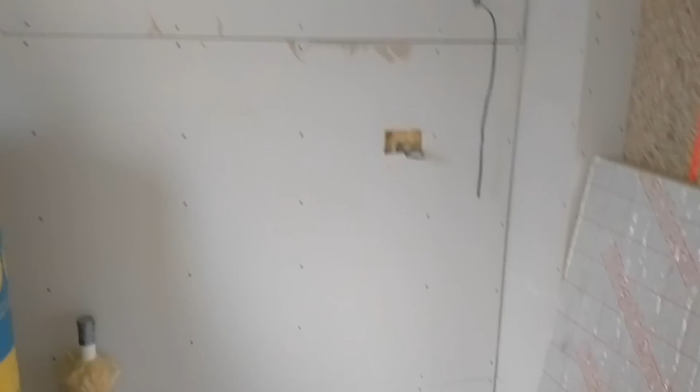Back in the utility room. I honestly don't know where this video is going to fit in, or if it's even going to make it into the cut, but I'm back in here, and I suddenly had a thought in the middle of the night last night that this is a utility room.

We're going to have a tumble dryer and a washing machine stacked there. It suddenly occurred to me, do I need to have ventilation in this room that is kind of manual, like a ducted extractor fan, basically an extractor fan. I looked on the regs, and Part F, which deals with ventilation, isn't 100% clear, but the best guidance online is that yes, it does.

I obviously haven't planned any of that, and I haven't run anything. Now, I've bought a Blauberg extractor fan. I actually bought this for the downstairs toilet. It gets really good reviews, German quality, really quiet, and it looks kind of modern and quite nice. I've got some ducting for it as well.

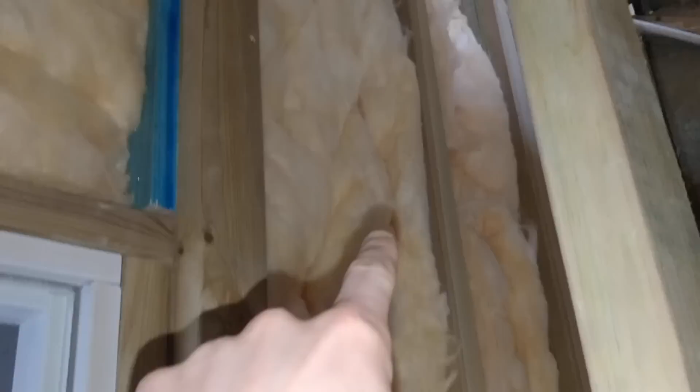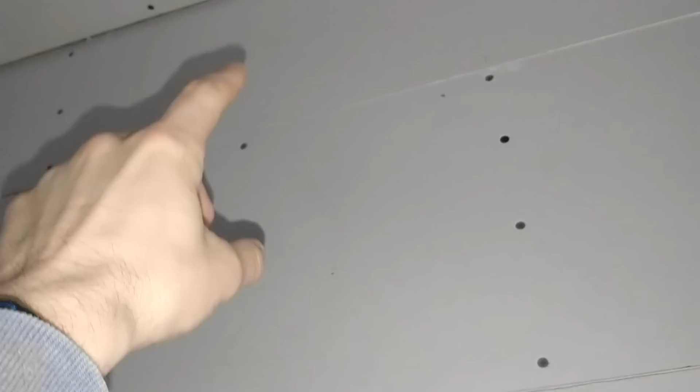My plan is to put it in the wall up here, and then send the ducting up and over and down this way, and out the wall that way. Now, that portion of the wall very conveniently sits on this side here. So what I think I'm going to do is get another extractor fan and have it coming out through here, sitting up around there, ducting out.

So then on this side, where I'm open currently, I'll have one bit of ducting running this way, another bit of ducting, and a Y, and a non-return, like a backdraft stopper, that will stop the smells, any smells, from cross-contaminating with one another.

It's worth pointing out that you would normally have an isolating switch, and you would wire the fan into the isolating switch. I cannot do that in this instance because I am using Kinetic switches, which are very different - you'll see them in another video - but it means the fan will always switch on and always switch off with the light without any isolation. Obviously that's not ideal, but there isn't a lot you can do about it, and it's one of the drawbacks of using Kinetic switches.

So that's the plan, and then what I can do is send the 3-core and earth through that way, and that will power this here. The fan will be powered on the 3-core and earth, the cable can come in through there, and what I can do is take this panel off and run the cable through, because the light is going to be around here, so it'll run off the lights, as a mains powered 3-core and earth.

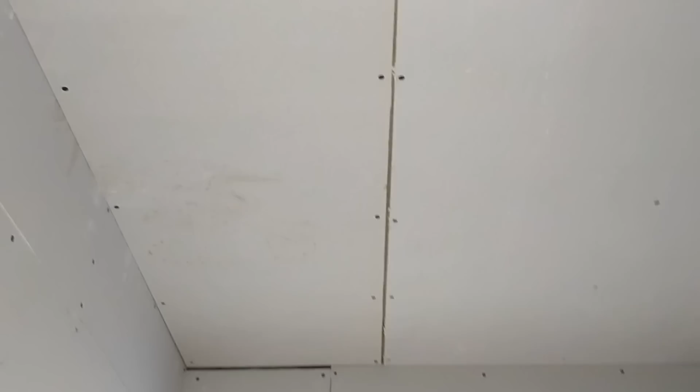So I have now run my 3-core and earth cable. This is just a 1.5mm 3-core and earth, which is why it looks a little bit like a 2-core and earth, because it's not as big.

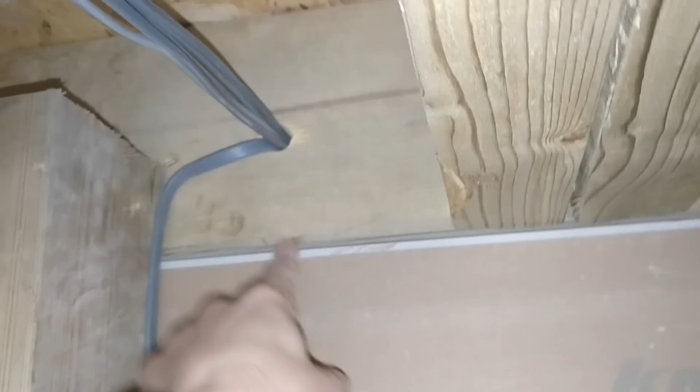So I've got that there, and I haven't decided whether I'm going to run it tight along here, or I think running it around here is most safe because it's most out of the way there, and I've got enough excess on the cable.

Doing it from this side of the room, I can obviously see where the top of the ceiling is there with that extra piece of plasterboard that's poking through with my torch. I can then offer this up here, and I can see how high or low I need to go, and where I want this to be.

What I can then do is offer this up like that. I can draw around it, cut it out, then pocket it from the other side, and secure it in place, etc. So it actually works out really nicely doing it like this.

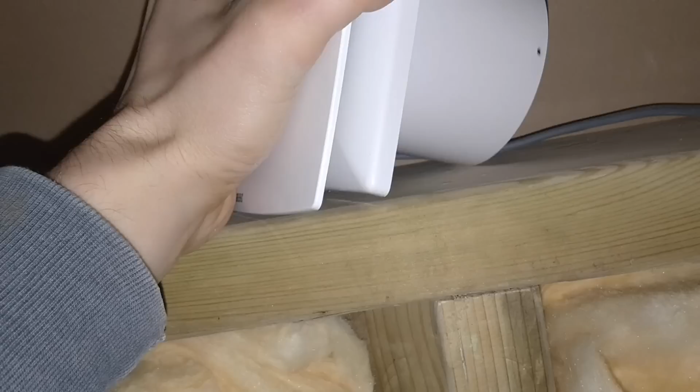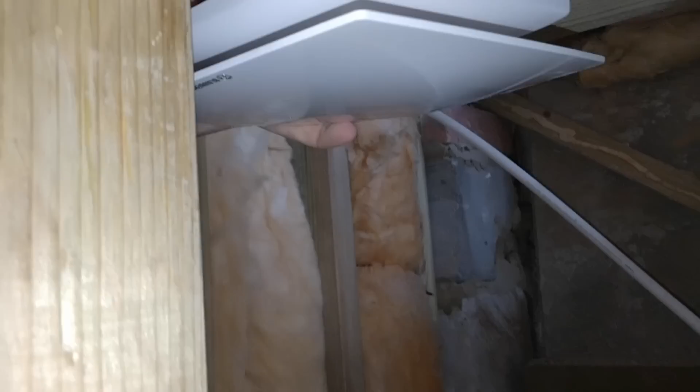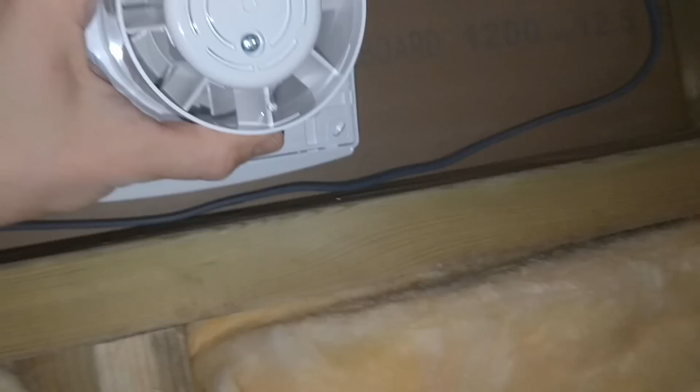Now this is actually quite deep. I don't know if you can see how easy it is to see there, but it takes up quite a bit of space. So over here on this side, I'm going to have a think about where I place it and how it ducts. It may be that I do it up here in the ceiling, in the roof instead, but then it's tricky. Or maybe here in the corner, because I've got flexible hose that I need to run. So I'm going to have a little play with that and think about it as a strategy, and I can sort that.

But yeah, bear in mind there's always this little plastic film in here. That needs to come out, otherwise it's going to cause you issues.

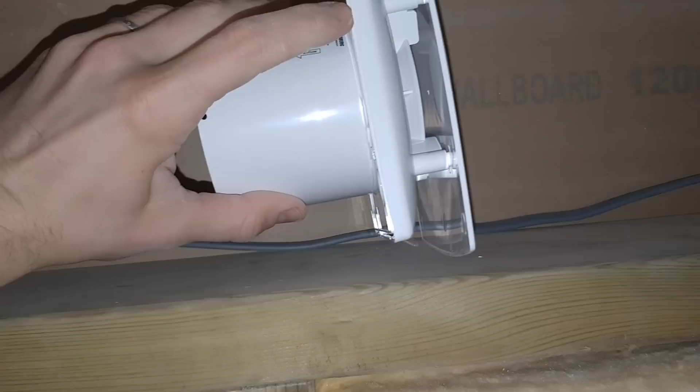But otherwise it's quite an easy job, I think, to get this in, and then I can figure out where exactly in the room I want to have this ducted. So it sits here on the plasterboard. There's probably 3.5 to 4 inches that stick in the wall, and I've got 6-inch timbers, so that's actually pretty good.

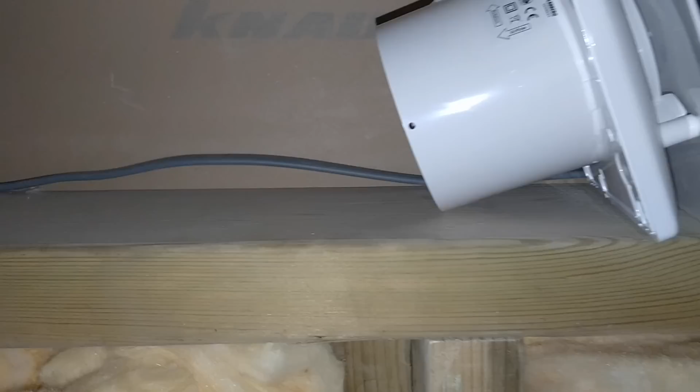But I obviously don't want to have it too tight as a bend when it first comes out of there, although it's air, so maybe it's not too much of an issue. I was thinking I would just trim this down if it was too deep, but I can't because the fan unit is all of the depth of that. So there's that.

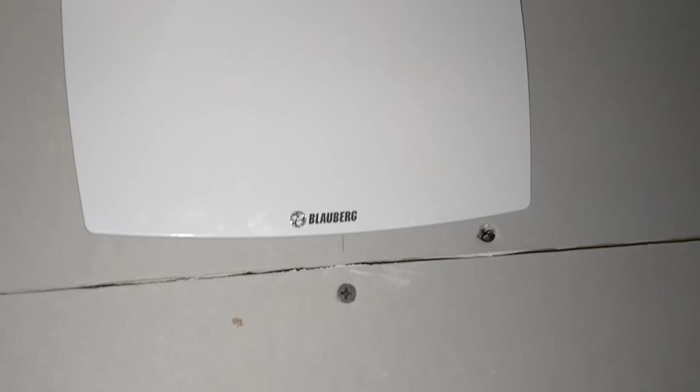So that is what it will look like once the wall's plastered and it's all secured on. That's how it will look, which is really nice. Did a nice snug hole.

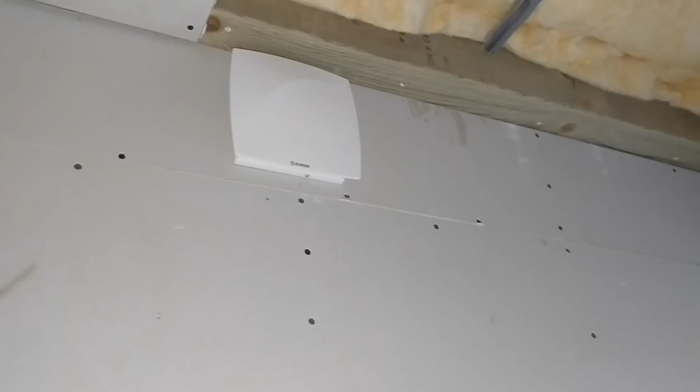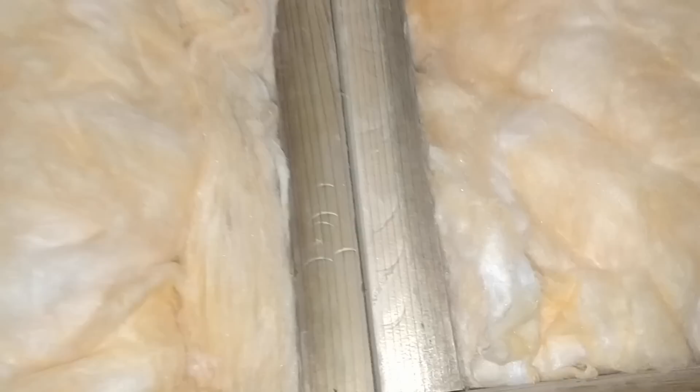Just going to move my ladder and I'll show you what I've done on the other side. So that's the bit that I cut out. This is it on the other side. I actually cut it from this side, hence why there's all this dust up here. Got nice excess length on the cable.

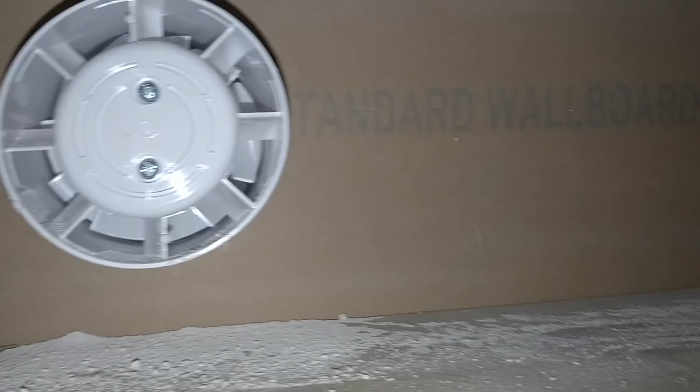I'm really happy, although I can't see immediately where the cables run through. So I'm going to take it apart and see, because I might need to drill a hole to be able to feed this cable through. So I'm going to have a look at that now.

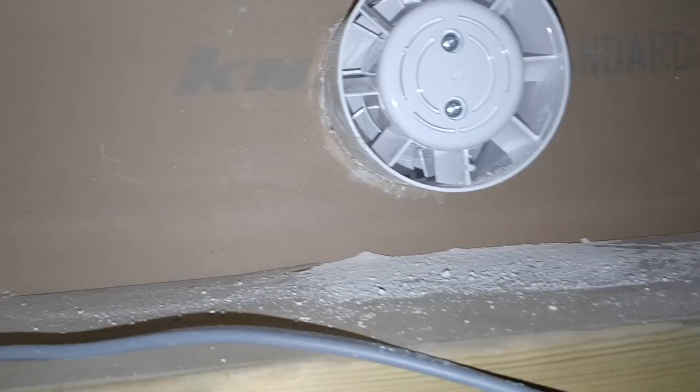So you can see the wiring up in here. Got the space for the screws to go in. There's the switch live, which is the grey wire, and a 3-core and earth - the neutral and the live. This thing's completely plastic, so actually there isn't any requirement for an earth.

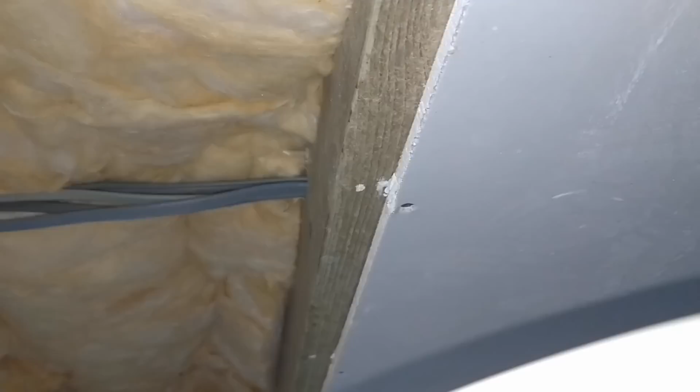So I'm not sure where I'll even put the earth, to be honest. I could snip it and leave it, but have it connected up on that side. I mean, the earth, the CPC, is actually for the protection of the device rather than the cables.

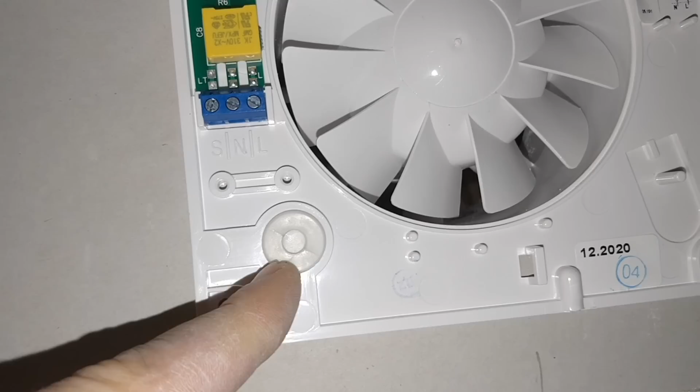But yeah, look, you can see there are these holes here, these grommets that you pop out, and that's where you then feed the cable through. So that's like a little rubber grommet.

If I had a bit more - hang on, what I'll try and do is just pull this out. There you go, so that little rubber grommet comes out there. And I actually don't need that anymore because this is plastic - you don't need a rubber grommet around it. If it was made of metal, I'd need to earth it and I'd need a grommet. Obviously that's not the case here.

So what I'll do is I'll kind of poke a hole through here and then I'll feed the cable through down at the bottom there so it can come up in here. There's also an access point here, so that's quite helpful, I think.

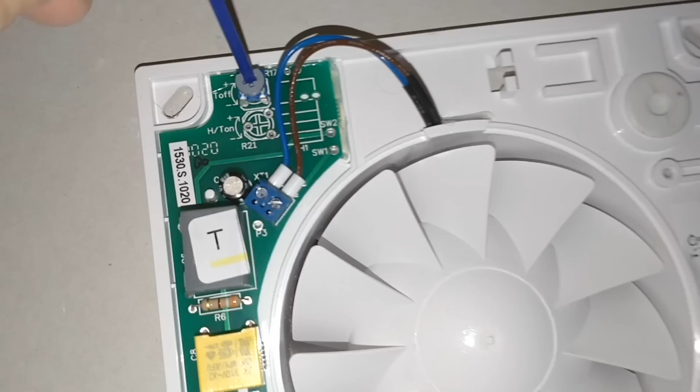The other thing that came with it, I haven't read the instructions yet obviously. The other thing that came that was kind of tucked inside is this - it's a key to be able to, because that's the timer, so you can kind of say how long you want it on for. So round to the right is do it for longer, left is less. So that's just a little resistor, and then you kind of dial it in. So that's what this is for.

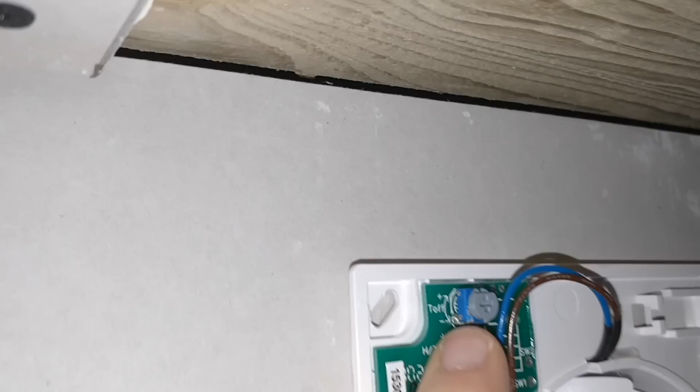So I will leave this in here, and then it can hopefully not rattle around too much.

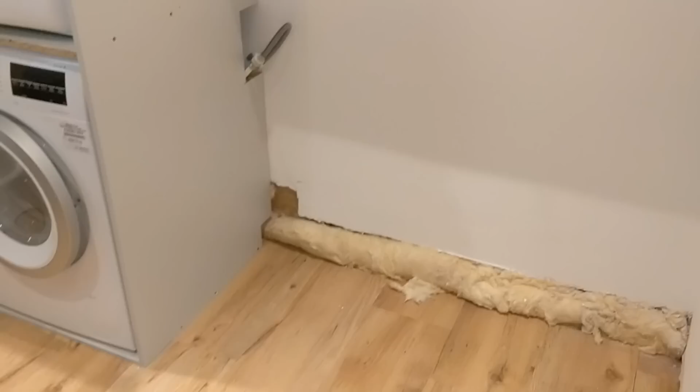This is where I'm at the minute. Built this custom housing, as you know. This is all fixed in place now - these are fixed into the wall, so then they're not going anywhere.

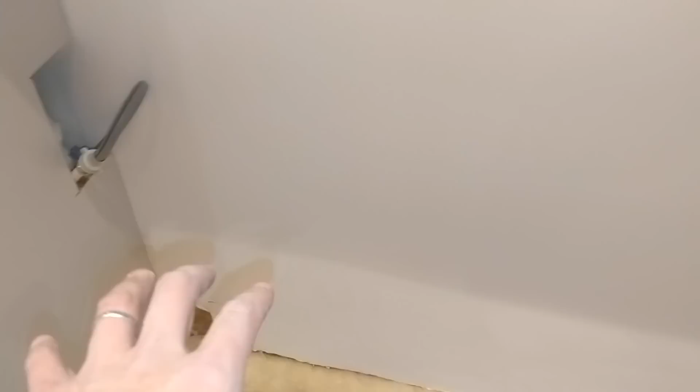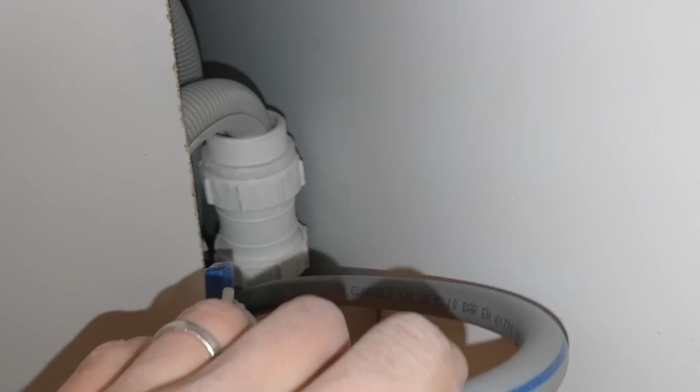I've got cabinets that are going to go in here, and I've got a sink - this undermounted sink, got all the waste and everything. So I need to make sure I can plumb that in, hence why I've cut out this big gap here, so I can hook up the sink nicely.

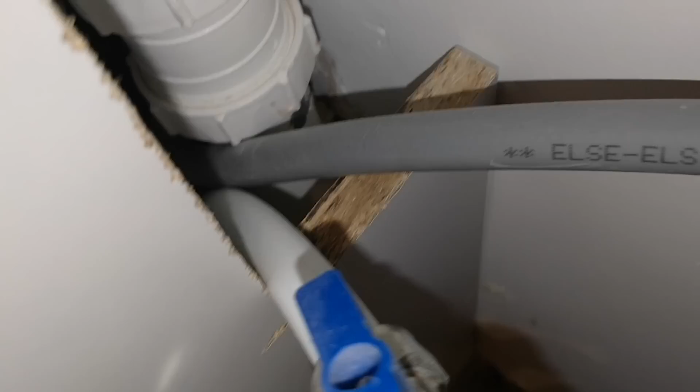Just want to have a little think about that. I've got the hose for the washing machine, a few other bits to consider. So obviously I've got the sink, so I may well pull the washing machine out of here, give myself a load of space to then make all my connections for the tap, for the hot and cold feed and all the rest of that.

But I need to build units as well, so there's quite a bit to do in here. You know, it's not just a case of building units and plonking it on. It is that, but it's also a little bit more than that to make sure that everything works.

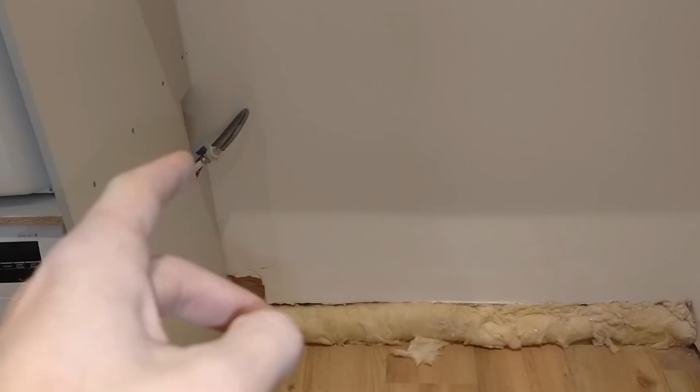I've set the height of this so that these will be hidden. These screw holes will be hidden by the counter, which is kind of neat, as will all of that.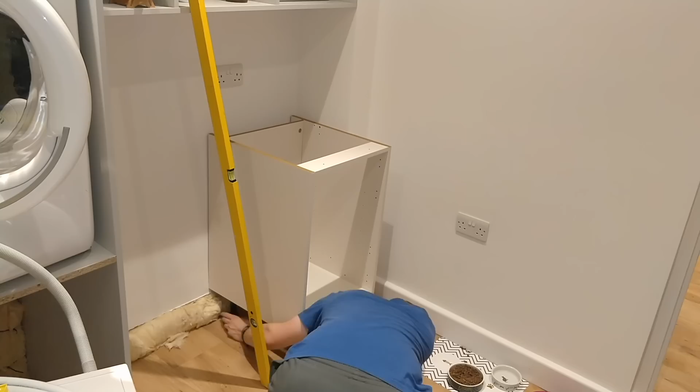I'm just about to cut out the space here for this, there's a boxing in which has all the pipes hidden in it. I'm about to cut it out, which I'm quite looking forward to doing. You may remember when we had the kitchen counters installed, the guys just cut it freehand because they're wizards. If you haven't seen that, I'll post a link up here. I'm not going to be doing that freehand. Well, I will be doing that, but I'm going to be marking everything up first.

I haven't tested this yet, but I'm wondering whether I've got like a white chalk. Yes, look at that, quality. So I can mark on here exactly where I'm going to cut. This is like one of those little chalk pens you get. And I've got a brand new fresh blade for the angle grinder, and a Procore battery as well. So hopefully, and some PPE as well, and I'm outside. So my measurements, got a nice square edge to help me.

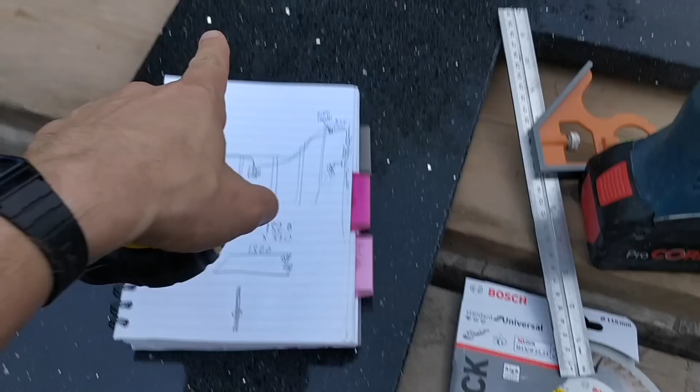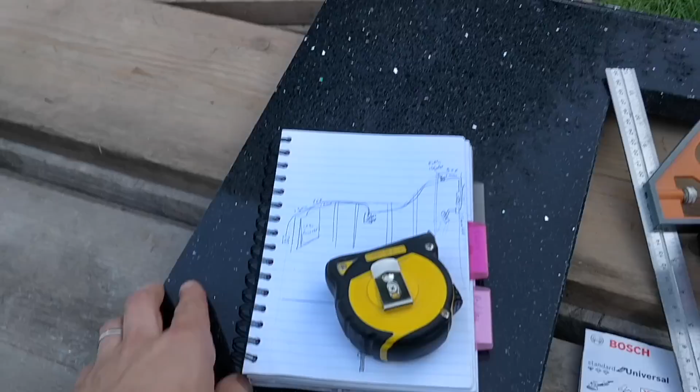I need this length back here to be 1320, 1320. I'm coming up 330, and I'm coming in 150. That will allow a little bit of wriggle room for me to then mount it and box it in, and then I can do the masking, caulk and whatever else up here. So I'm just going to spend some time measuring, marking, and then cutting it.

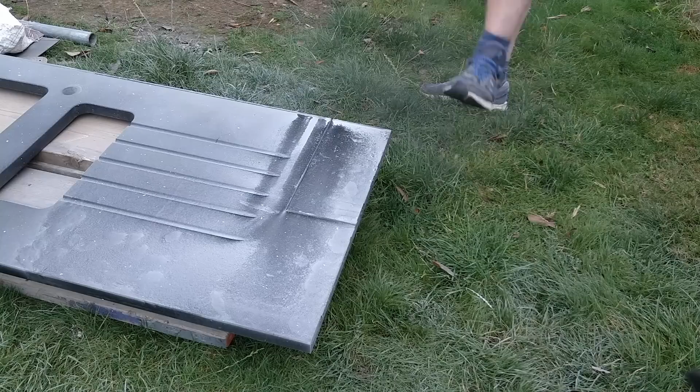Really nicely, that is super smooth, as smooth as I'm going to get it. This blade is brilliant, X-Lock blade by Bosch. It's got these kind of serrated edges, you get a really clean, smooth finish. Very happy with that.

You see, I knocked off the corner and then I gently took out the excess, the little bit that was holding it on. So yeah, that's done. Now I've got to test and see whether it fits. I'll take you inside and show you where we've got to.

Right, I didn't film the installation of this because I've mismeasured it. In fact, I didn't mismeasure it, I misordered - I ordered a 500 wide unit when I need a 400 wide unit. So that was very stupid on my part, and I don't know how.

Anyway, I bought this second hand, got it off eBay, and whoever cut this obviously cut it to fit their own walls, and it wasn't quite square, so this is out a little bit here and out a little bit here. I know my walls are square because I built them, and I cut this square, and that is nice and tight because I measured it and I cut that. So it is what it is.

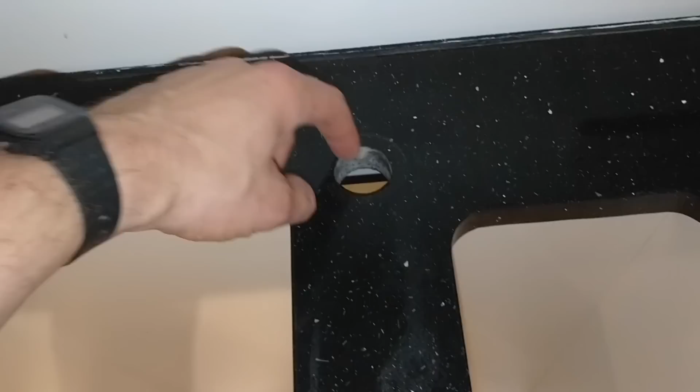I'll have to use a little bit of caulk or silicone, whatever it is, to try and fill this and blend it in. But it's in, and it works, and it hides the screw holes as I had planned and hoped. And I'll have to drill out a little bit for the sink, for the taps, but they'll reach, which is good.

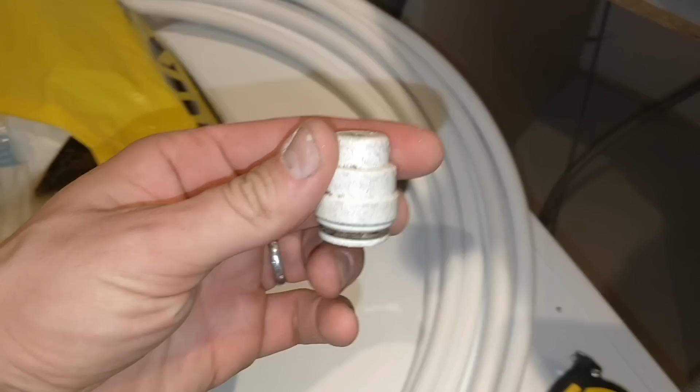So I'm actually going to attach those on now, or I might even just put some instant stops on there, one like this, just because that way I can switch on my water, hot and cold, which I've switched off at the mains. So yeah, I'm going to sort that now.

One other point to note, I have bought this second hand. When I planned and designed this, the sink was going to be much closer over here. Either way, that plug socket was always ambitious, and isn't actually very necessary - we have one here, we have one behind there, and we have one down there. So I will decommission this one. It's not safe, it's too close to the zones, having the sink here, plus the plug socket.

So I'll take this off. I'll connect up the ring at the back, and I'll put a piece of plasterboard over it and cover it over and smooth it and all the rest of it, because that's not right. So yeah, I'm going to sort the taps now. I'm going to call it a night.

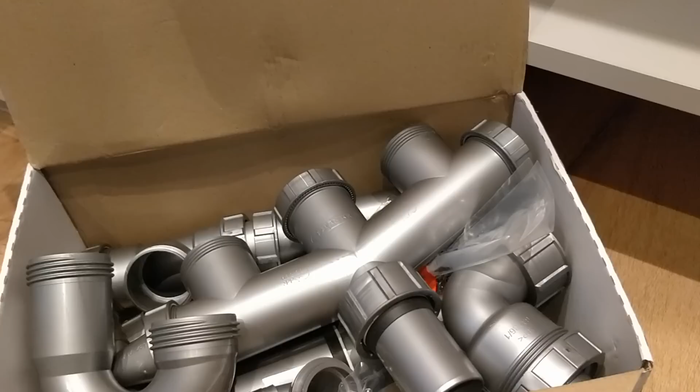This has now arrived, and by this I mean this. I don't know if Franke basically force you into using their products. I would have been quite happy to carry on using this, except for the fact that it had been cut off and it doesn't seem to fit any other standard sizes.

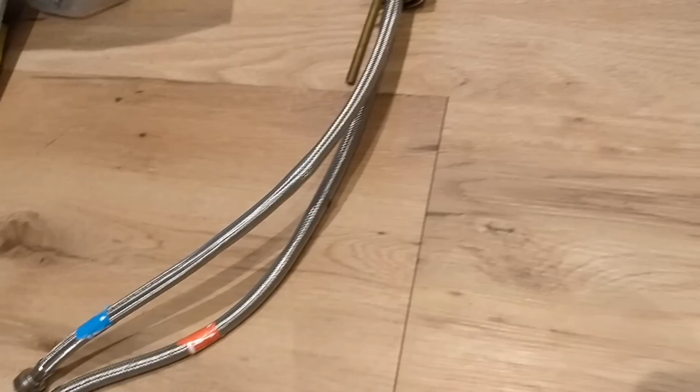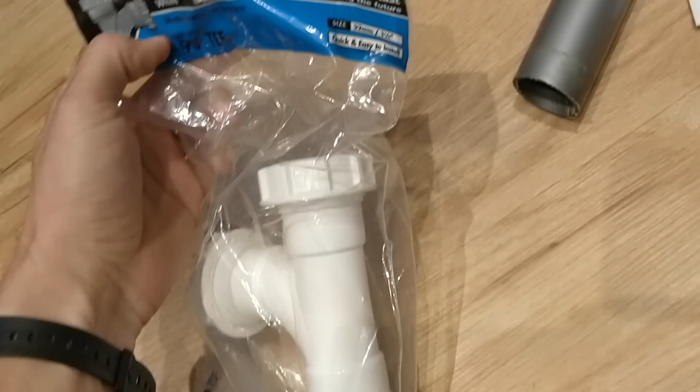I tried 32mm, I tried 40mm, I got a whole range of different sizes, 32mm, and it looks on the outside like it fits and it's the same thing. Yeah, you look at that and you go, yeah, that's close enough, and then you screw it on and it doesn't screw on.

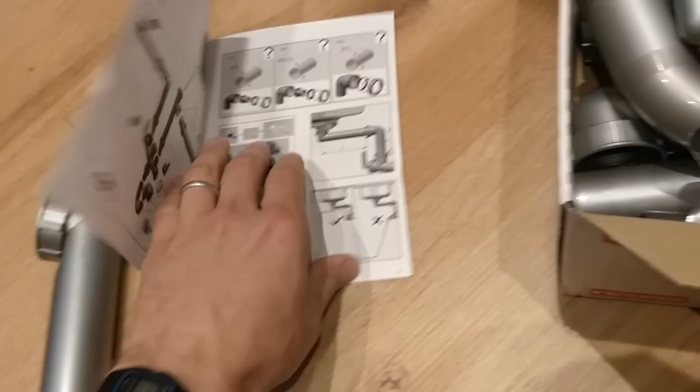So I've had to buy a Franke one. Thankfully I was quite fortunate - well, quite pleased. This was only £30 off Amazon, so that is very good. I'm basically now just going to put it together. It's pretty self-explanatory, and I have to say they work really very nicely.

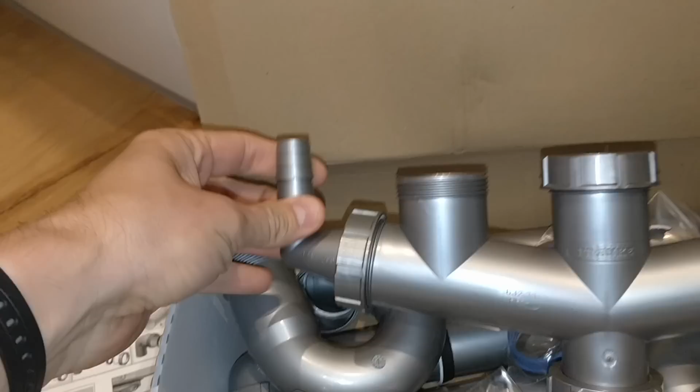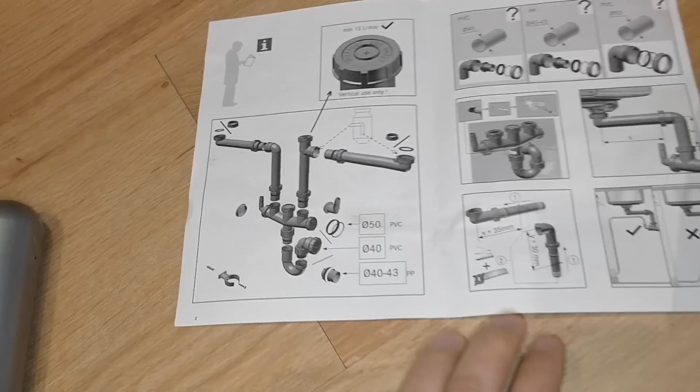I'm going to rig this up, and then once I've put it together and figured out how big it is, I'll figure out where the waste needs to go out, and for the waste of this to come in here and go back out, because it's easier attaching the waste end onto one of these rather than having a splitter and the little hook. So this is what I am going to be doing now.

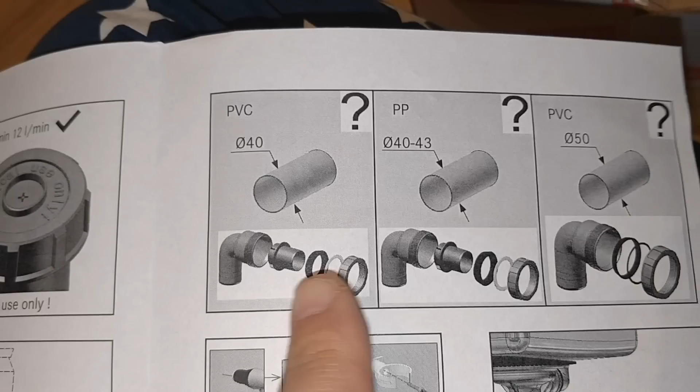It looks like you can put it onto different sized pipes if you get these different converters, which I don't have - I'm not a plumber, you all know that. Either way, I've got this now, so it's all good to go.

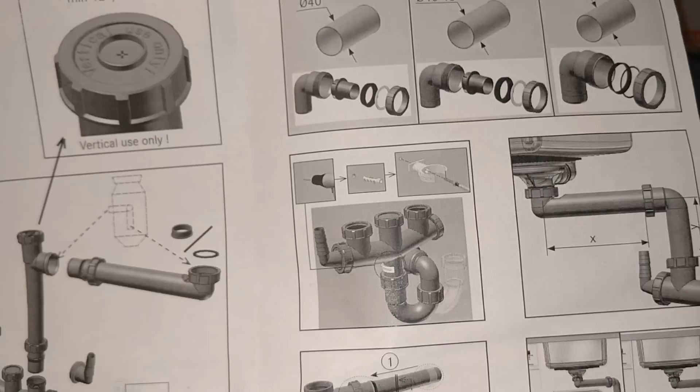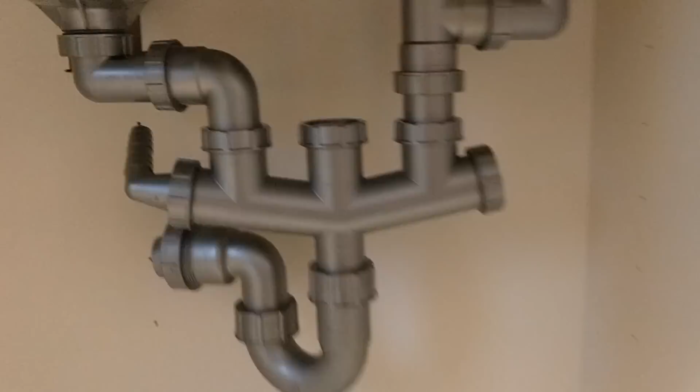Right, I've chopped down various different sizes of the pipe, taking off the bits I don't need, and now I'm left with this, which is great. So I've got the bit coming out of here - I think that's going into 40mm pipe - and then I've got this available to do the waste for the washing machine. So I'll start looking at how I can get this coming out.

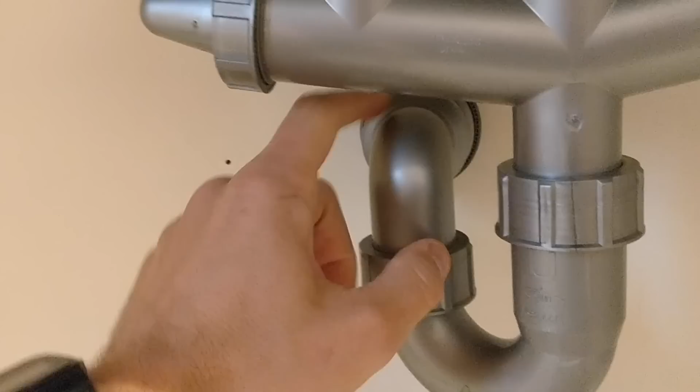Ideally I'd like to go straight out this way and then along the back, rather than coming across inside here or going at an angle - it just doesn't look very nice. So the more I can do to neaten this up, the better.

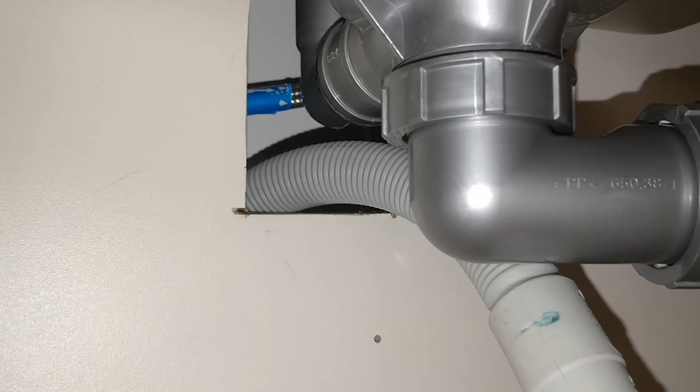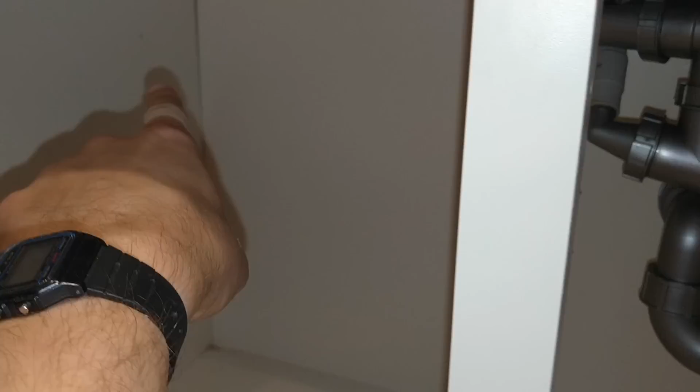I didn't film any of this because I'm useless at plumbing and really needed to concentrate - I can't do it and film it very easily at the same time. But I now have the hose here, and I've also connected up the pipes at the back. I can't really show you any of this, I'm sorry, it's not very good of me. But this goes back and turns at a right angle, has a nice shallow fall, and then drops down here, and the taps work and it doesn't leak.

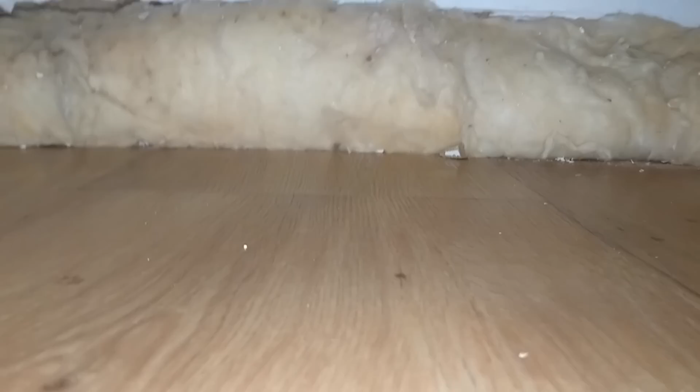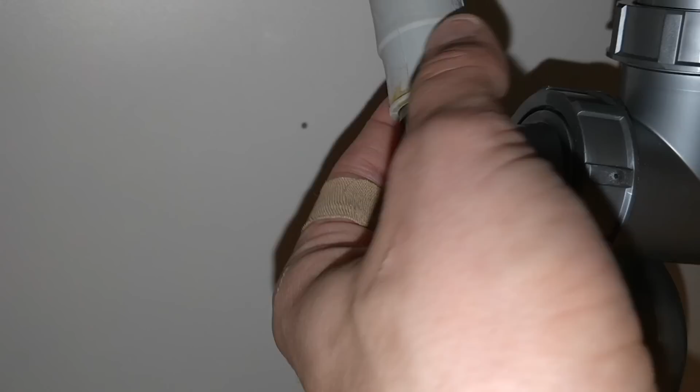So I have hot and cold running water, and it all runs through here without leaking, which is a bit of a miracle. I did have some leaks, but I've stopped them. So unless this leaks, which is not impossible, but I think the design is such that it should be okay, I might put a Jubilee clip on this.

That is pretty much it, so yeah, that's a win in my book. I need to get some sealant around the edge, and I need to get this other unit in, and I need to tidy up all of this. But other than that, it is done, which is really a big relief.

I would love to be able to say this is the finished product, but it's not because I haven't done the toe kicks. It feels like there's always something - I get kind of 95% the way through, and then there's another job which seems more important.

So I still haven't done the sealant at the back there. I did do it all around the sink - I used CT1 to stick it in place, but it's functional and works really well.

We've got doors on both sides, so that's the little pull-out racking system for household products. And I was able to use this offcut here - that's the offcut from that back corner, and it just happens to fit in there really nicely.

I didn't film building any of this because I just bought it all from Cut Wrights and assembled it - it was really very dull. I forgot to get one of the bits finished, so I need to order some edge banding and iron it on.